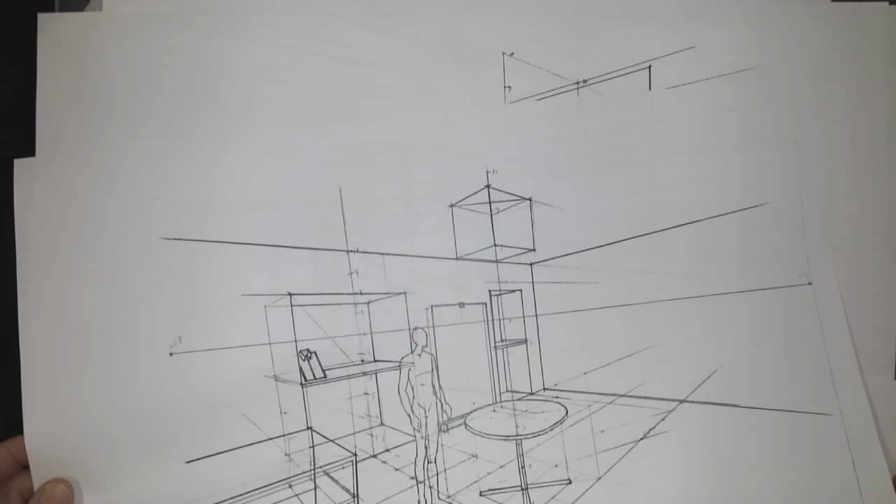So we're at the point now where we're detailing our retail space. This is just a section of it. Since it's going to be quite a large store, we're only just looking into one small corner of it. You're going to choose which one you're going to use, either this diagram or this diagram. And whichever one you choose, you're going to have to deal with some empty space.

What I did was bring my chair over, the one that was missing from this view with the table in it, and put in a couple of built-in displays. And I kept essentially everything over here. I kept the banner in the right place, but you can change this about. It doesn't have to be exactly like that.

And then I put some mannequins in this built-in rather than putting merchandise, and I put merchandise in here. So whichever one works best for you, that's the one you're going to start with, but plan on adding some more so that you can have a balanced space and not empty spaces.

Even for my figure, I needed to find someone, and it fit pretty well with the figure that I had chosen already. There wasn't much to do to change him, but I needed the detail on the clothing, so do find references that are going to work for you. Also, I needed something for my light fixture. Everyone's got a light fixture, so you're going to need to find that.

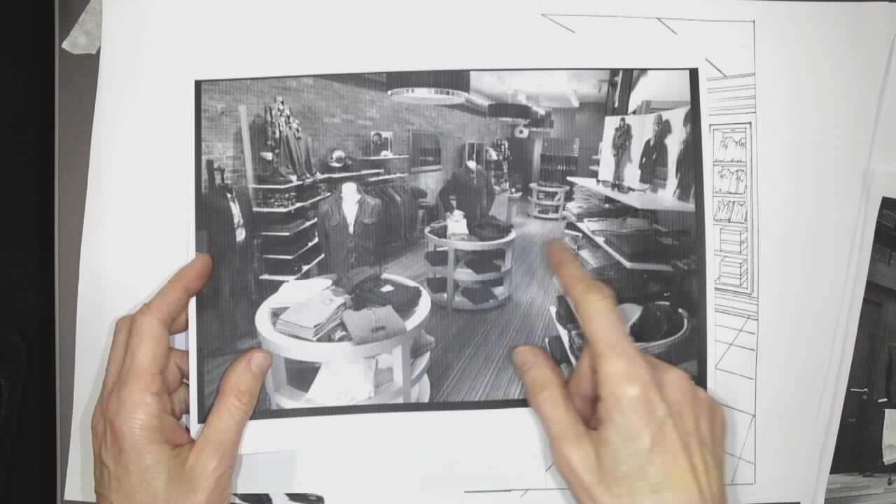And I also needed them for my displays, how to lay my merchandise out, how it would look, how to draw these collars, all of those things, and my mannequins, my half mannequins, how to draw them. So rely on your references quite a lot.

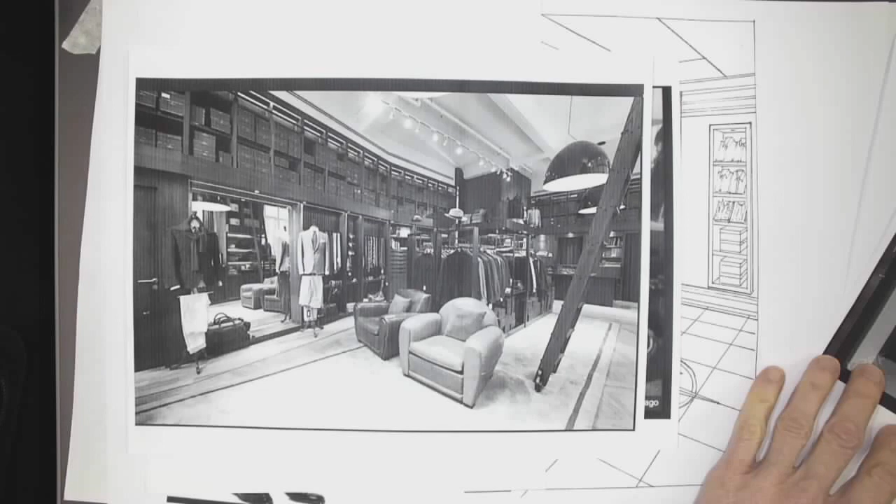Also, it never occurred to me, but some of these shelves can be filled with boxes for shoes, so that was another way to fill up some of this space. If you don't, it's going to call attention to it. And that's not really where we want to be looking. We want to be looking at the whole space and how the whole thing is organized. Do rely on your references quite a lot.

So I love this all wood because the concept for mine, it's very important to have a concept for the atmosphere you're trying to create. I wanted it to be almost like a tailor's. I called it Ezekiel, an old-fashioned traditional name, a biblical name, so I wanted that sort of atmosphere.

And if it's all wood and leather, it will have that sort of appeal and look quite upscale, but modern as well. The suits are tight-legged and so on, so the merchandise will stand out from that austereness of the traditional square. Everything is really quite square. And I put the compass with my logo because it too is a traditional visual icon. And I have it as an inset in the tiles of my floor.

You try to plan your balance as best you can. Anything that's a circle is going to call a lot of attention. So you really have to repeat it so that it's not the only circle. So when I put this here, all my attention went right there and nowhere else. So I had to balance it out with other ellipses and circles in other places to get the space to balance. So count on doing that.

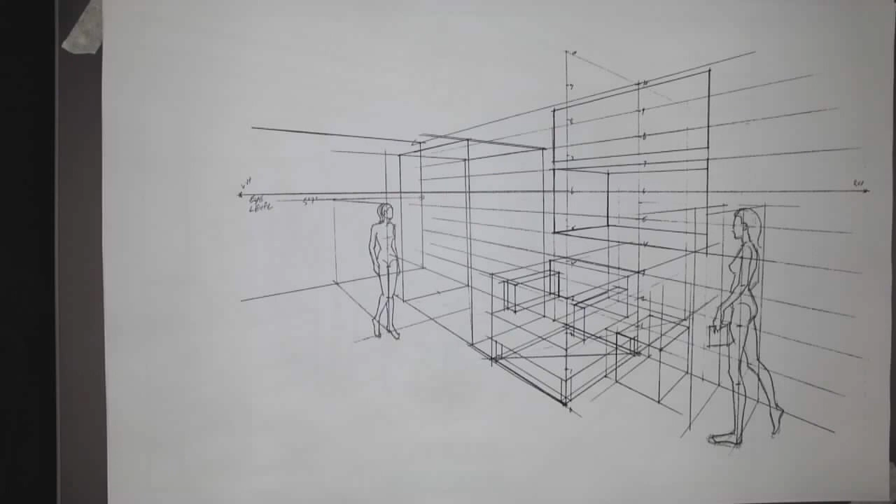Now if you're working with this drawing, what that means for you is that you're going to need to find it, first of all. And how you do that is to use your vanishing point. Now we found that this was the center. If you'll remember, we made an X here and found that this was the center of our display over here. I'm using my vanishing point.

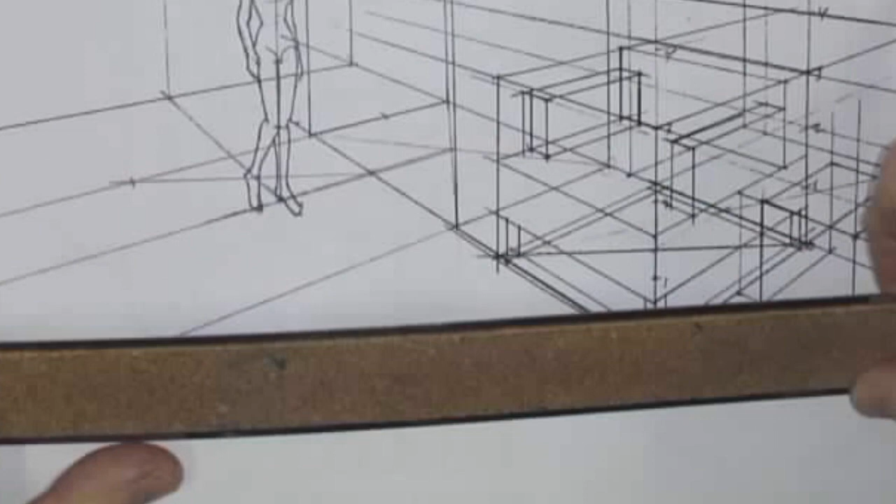Now, this was 3 feet on our floor plan. Remember, it was 3 feet. This is the center. So remember using that diagram. If I extend these lines, and I use this diagram, I go from this far corner at the back and through the center of this. That will give me the next 3 feet. And I have to go not just 3 more feet. Okay, there's 3 feet.

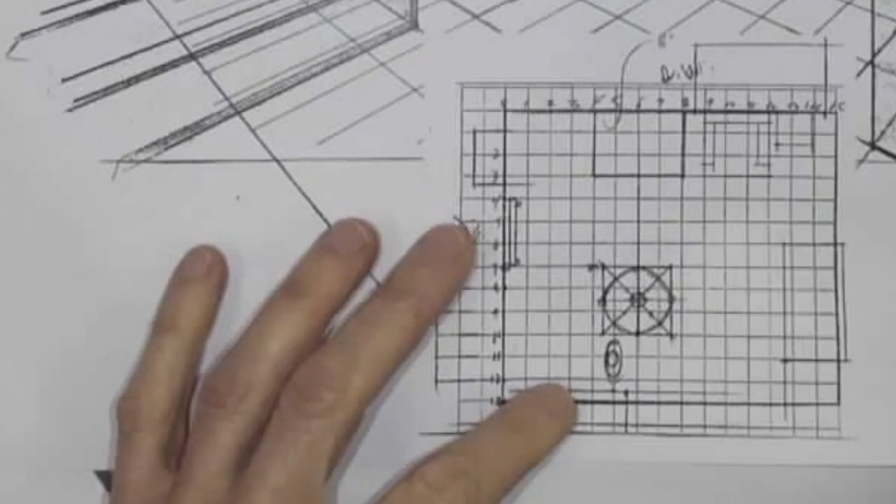And this is why I wanted you to bring all of these back so you can refer to them. So if you look here, the center of the table is where the light is hanging. So we need 3 more feet. 1, 2, 3. We've got that. And then we need 2.5 more. So I may as well go another 3.

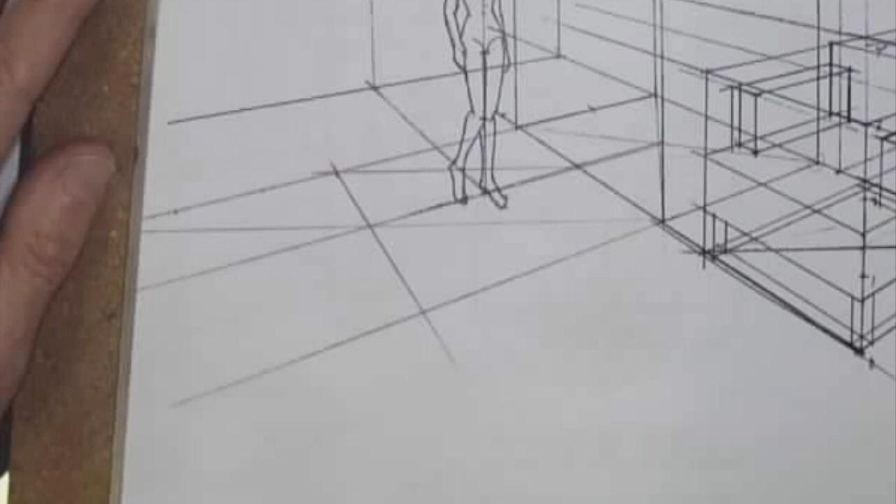So I've gone another 3. And I'll just divide that into 3. And I'll get 2.5. So 2.5 is right here. So my light in this drawing is going to be that far away. Which will give us some good side lighting. So remember too, it's in the middle of the table.

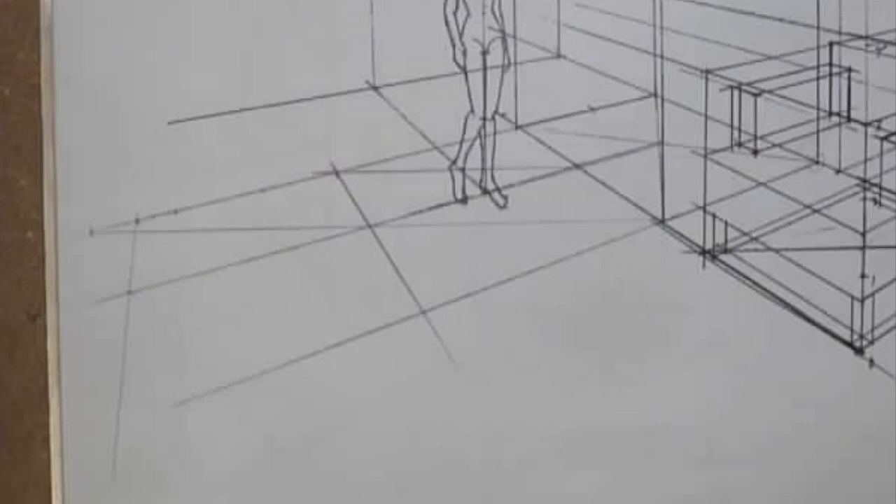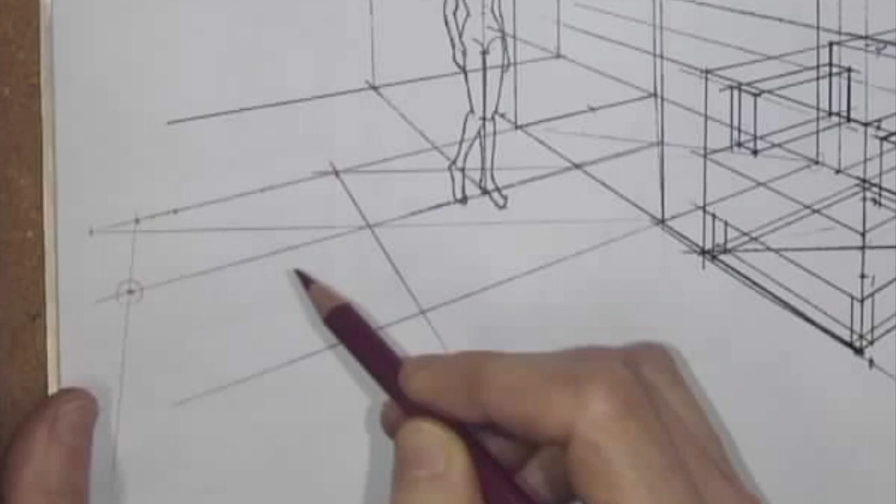So again, we've got 1, 2, 3 feet. And then 1, 2.5 to the center of the table. So 3 feet, 2.5 to the center of the table. So that's the center of the table. And you have to take that now back to the wall. I'd take it to this wall because this is too distorted over there.

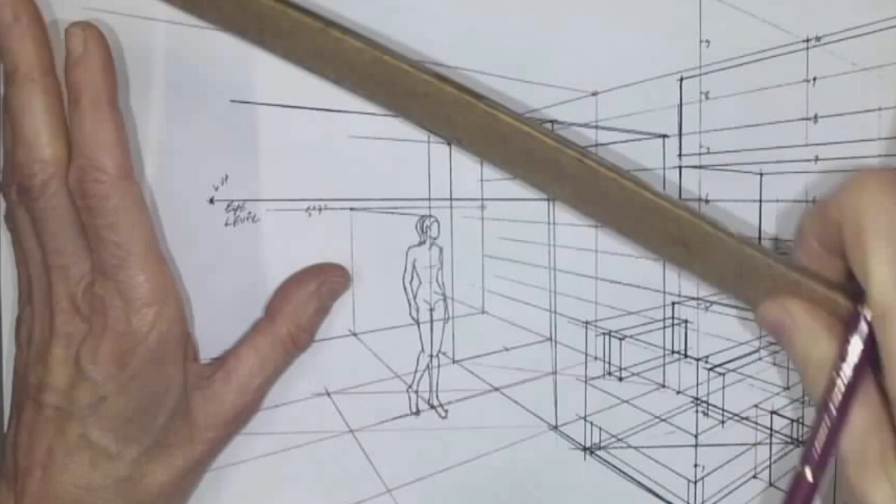So we're going to go all the way up to this wall, go up the wall, and go across. And bring this center of the table straight up. And that's going to give you the light source for your room.

So anyone that used this drawing, you need to locate the center of the table by going 5.5 feet this way. Go take it back to the wall, go up the wall, bring it across, and join where the light is hitting the floor above the table to the ceiling. And that'll give you where your light is. And you can use this now to map out your shadows. On the chair, the shadow would be going this direction. On this little table, be going this direction.

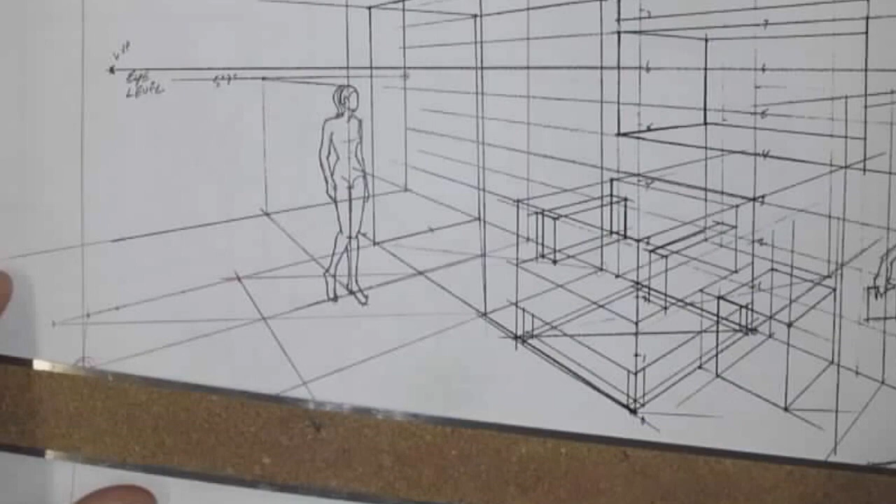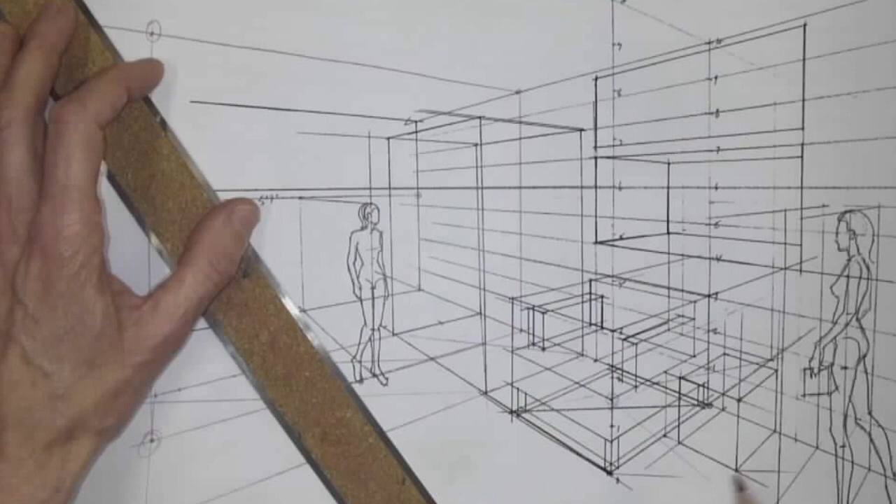Now everybody should be really familiar now with how to do your shadows if you did some of the exercises from the last week. I take the dot on the ceiling and go through all of these heights now, all the top planes. And that will give me how long the shadows are. Now, if I don't like how long they are, because they're getting quite long over here, I can make them a little shorter. I don't have to go with this, but this is what the shadow would look like.

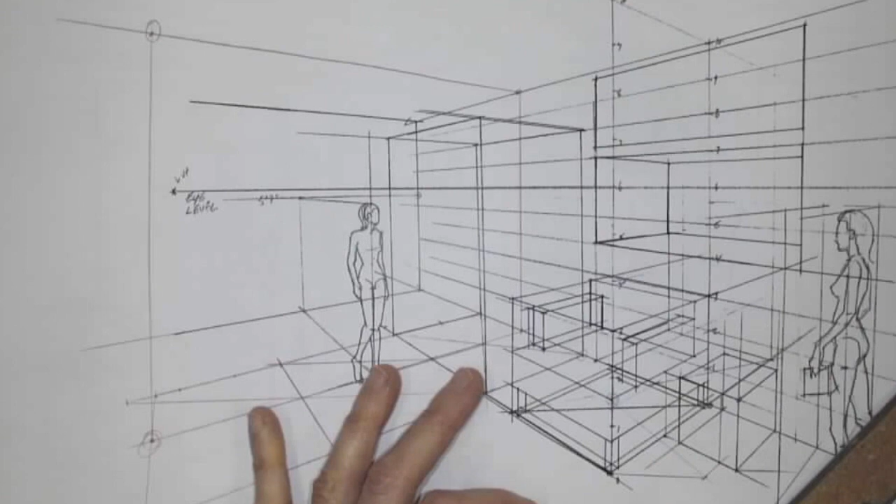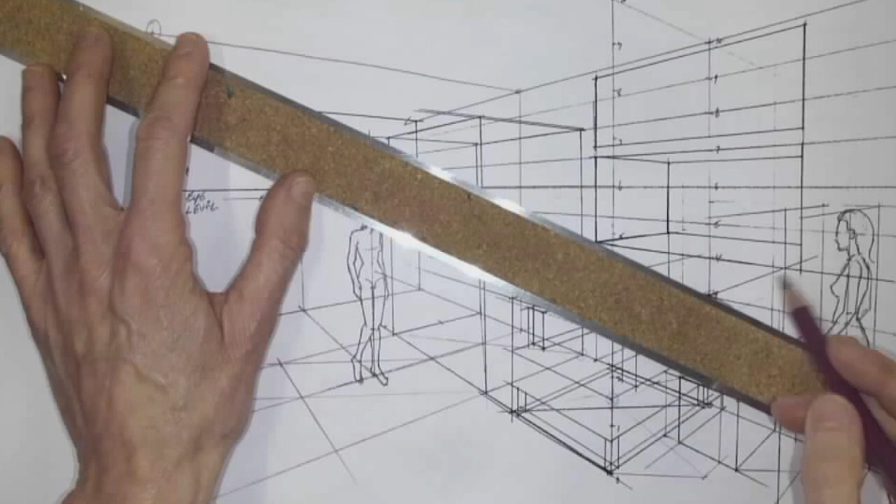And then it would go back this way. And then it would go up the box. And go across. So you just follow it. And it would probably stop there. Now, the top of the back of the chair against the wall will have a shadow. And you use the top dot to give you that angle. And you can probably bring it over. You don't have to bring it over very far, just maybe what looks reasonable.

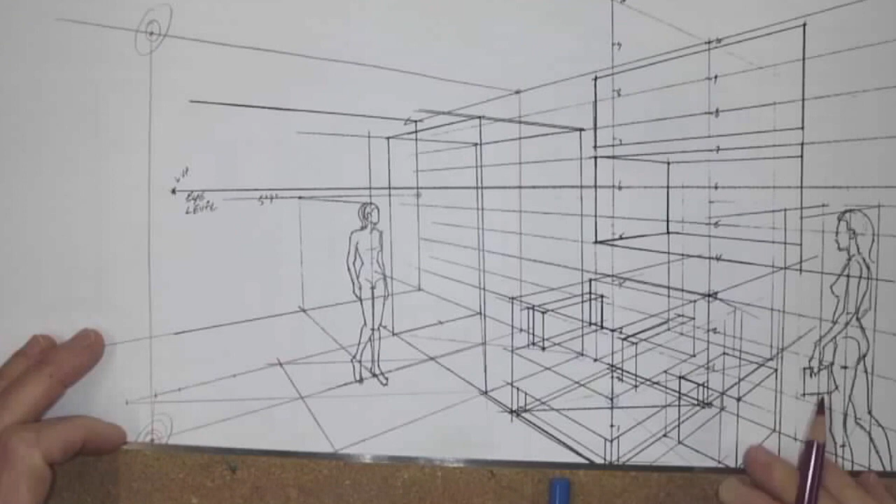Now, there are legs on the chair, so you would go to the farthest. Just remember, you use the bottom one to find the shape of the shadow on the floor, and the top one to find the length of the shadow, essentially. So, now I have to draw a line here. This is the shadow for that line on the chair. This is the shadow for the hidden line on the chair, of the leg of the chair. And this line is the shadow for that.

So where this leg met this gave me this line. So this is now the shadow for my chair. And this leg would have a shadow too. So that would be there. Now when you have a shadow attached like this, that side is all in shadow. So this whole side of the chair is going to be in shadow. And this is part of the shadow too. And this side of the arm is in shadow.

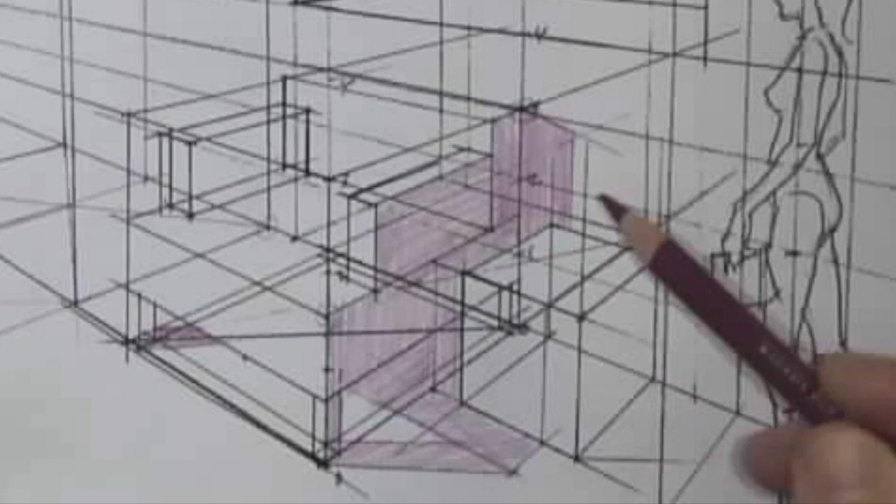And this is shadow. And the shadows help to hold the whole drawing together. And this is shadow too. But I don't think I would put it this far over, but you could put it. It might make it look dramatic though. As long as you don't put it in too heavy, that should be okay. And this side is in shadow. But you see, it starts to pull the whole drawing together.

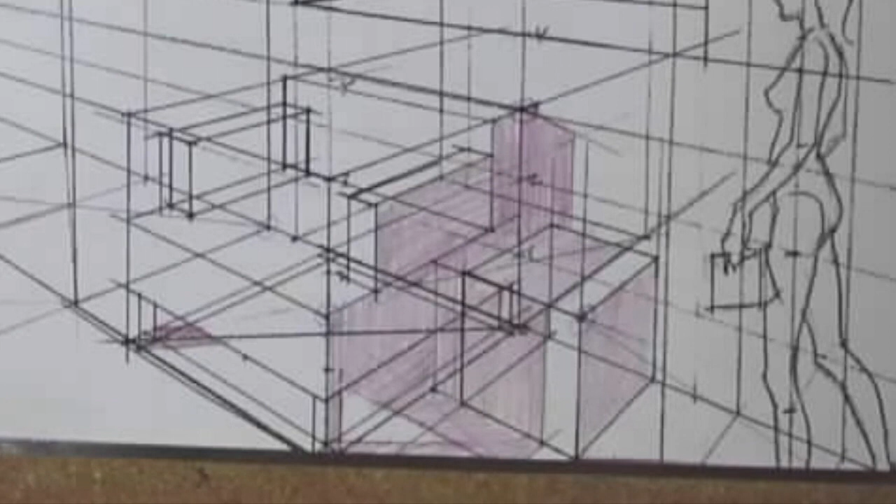And to get the length of that shadow, you go from the top corner, just like we did here, top corner, see where it touches this line, as this is the shadow for that. So these are long shadows, I think because the light is so far away. But it's dramatic. Where they cross, then you know to go the other way. So I'm looking for the shadow for that line. So I use this vanishing point. And when it hits the wall, you go straight up.

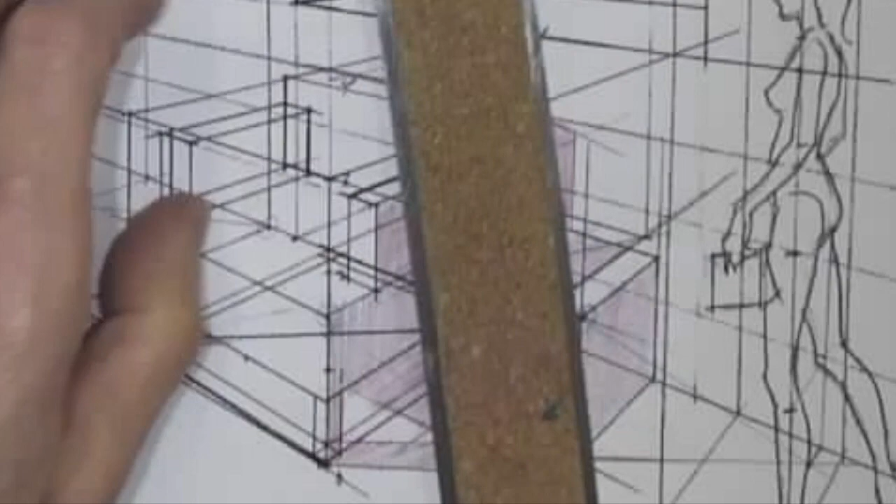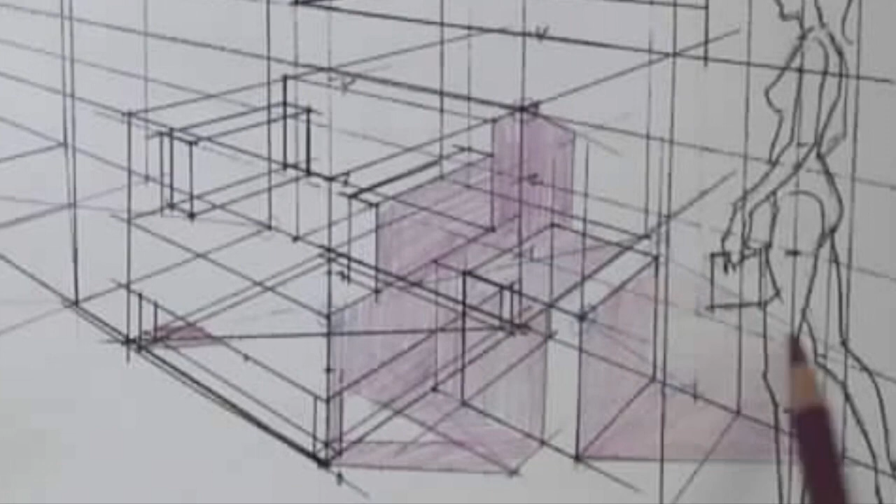And this again is the top, so I'm using the top dot to do that. So that would be how that whole little section would play out. So you just need the top dot for these. This is a built-in, so that would be shadow all in here. Now you're going to have lights above too, so you might have a penumbra here.

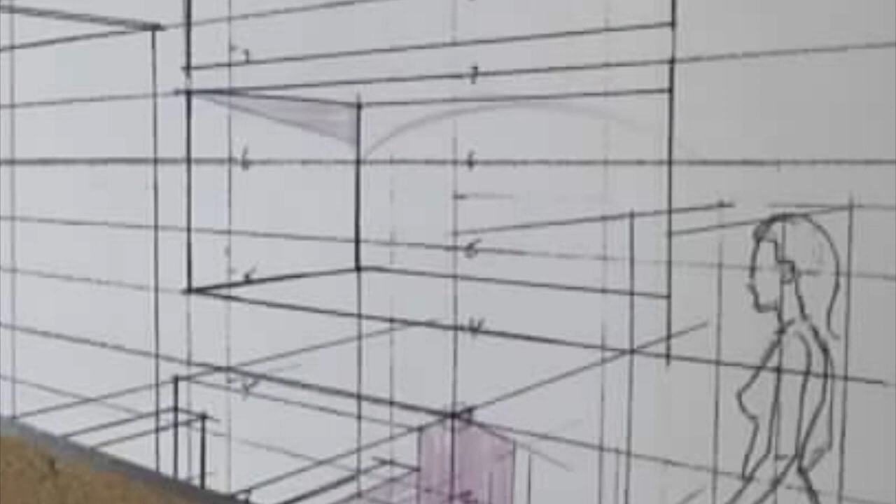If this is, now you've got to remember this goes like this, so the center of that is not where you think it might be, but there would be a little bit of a penumbra in here. Even the square lights in our room cause this to look curved, so that would be round. This arm, it would have shadow too, so you'd have to go up here a little bit. Just go up on this a little bit so you're about the same height, and that would be in shadow too.

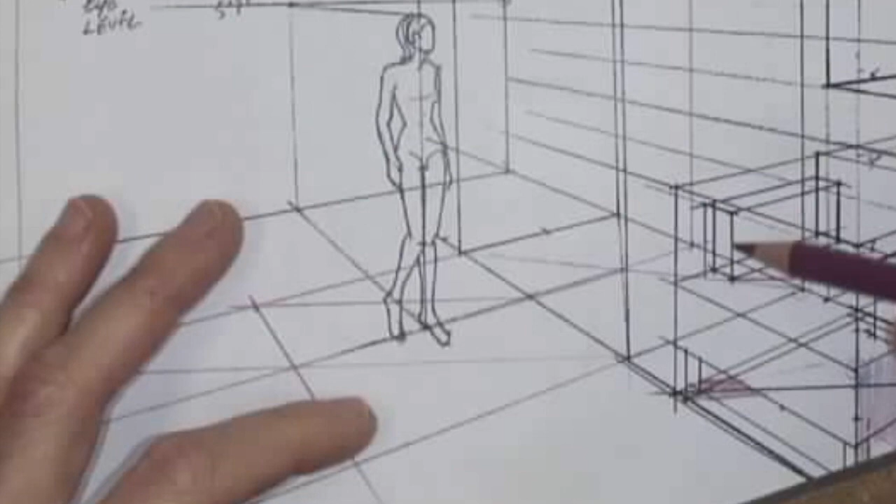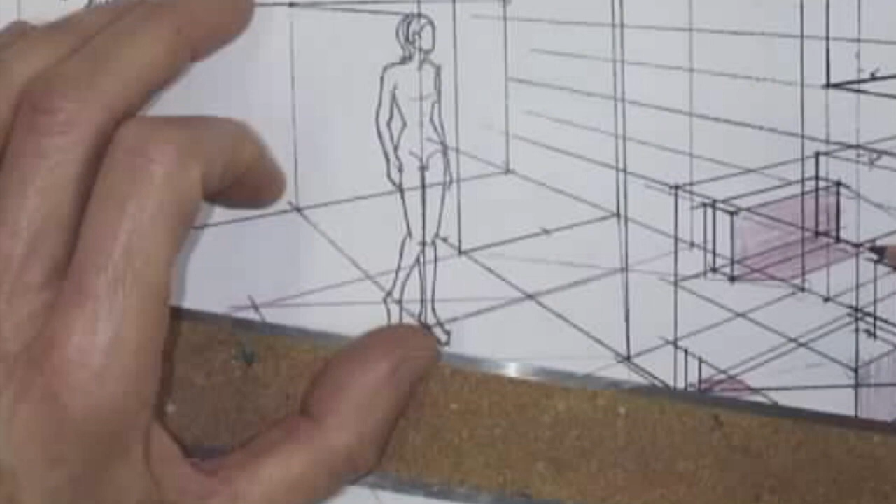And this would give you the shadow over here on the back. And this goes over to the back. So it's just the same as what we did in the little boxes that you did for homework. This now, if there's a light here, even if there is a light here, this is going to be in shadow. It washes the wall down below with light, but this would be in shadow.

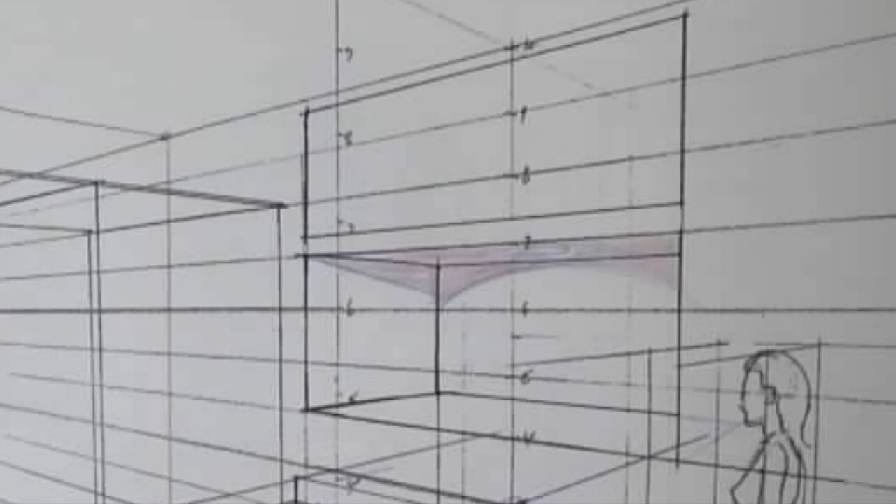Okay, and the banner, probably it will just have a little bit. If it has some thickness, we could put a little bit of shadow underneath it to help pop it out a bit. You'd use your ruler, of course. Now for her, you do the same thing. Use that dot on the floor. And we wouldn't want to put too much shadow for her, and we don't want to make it too... you just kind of start a little bit of a shadow for her and let it taper off. It would actually go up the wall, but I don't think we're going to see all the way out there.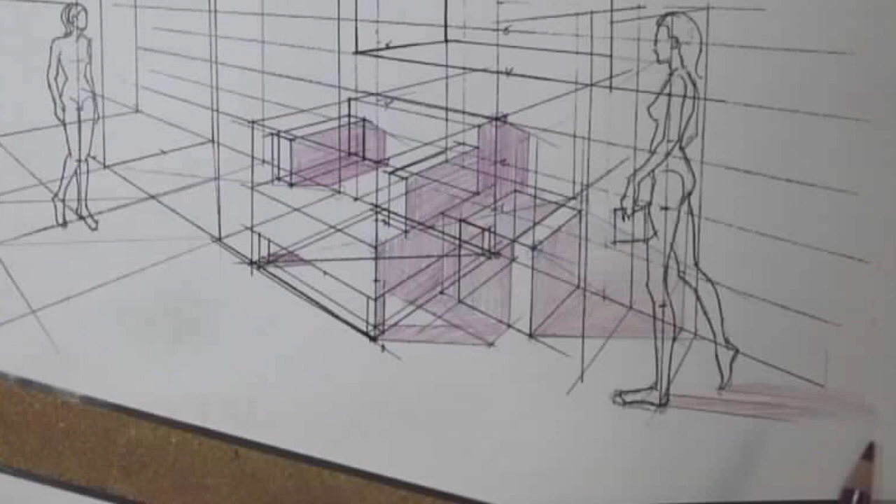That would be enough. And this one, she's behind the light, so that would be shadow out this way. And again, you wouldn't put too much. It would be her silhouette, her sideways silhouette. Depending on what's going on in here, you may not see it at all. And then, of course, walls, they all have the bit of the penumbra, because you can see on ceilings that they taper off into a little bit of shadow up here. But the way we're going to fill our shadows in, I'll show you. We're going to do some hatching.

So, now this too is blocked, so this would be all lit up. There isn't actually shadow there. This now would have shadow too. Because remember, we built it out from the wall, so that's going to have shadow too, which will help set up the chair. Now, we wouldn't have known that, and that may not have been possible, depending on where

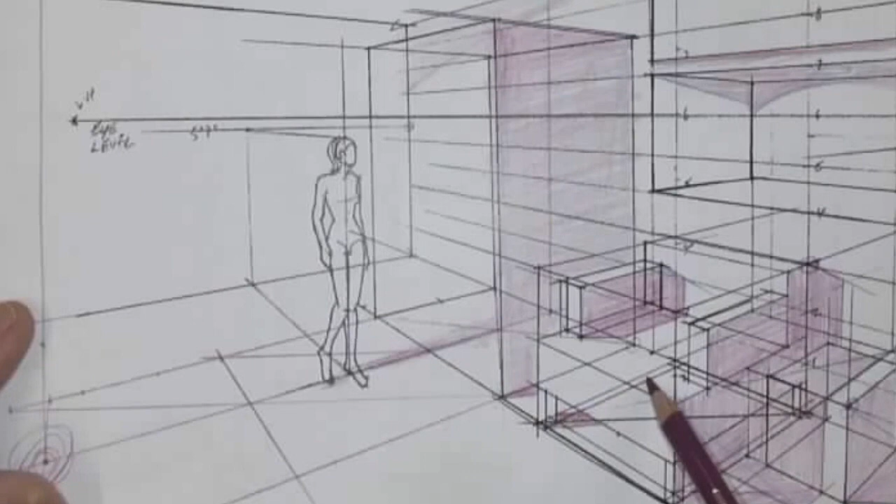this was in relation to it, but it's over to the side a little bit, so we will have shadow there. The shadow would probably go up the side of the chair and cover a little bit, but I wouldn't bother with that because we want the chair to stand out. And then this wall, it too would have a penumbra. The back of her, you see, would be in shadow, so it would just be the back part of her.

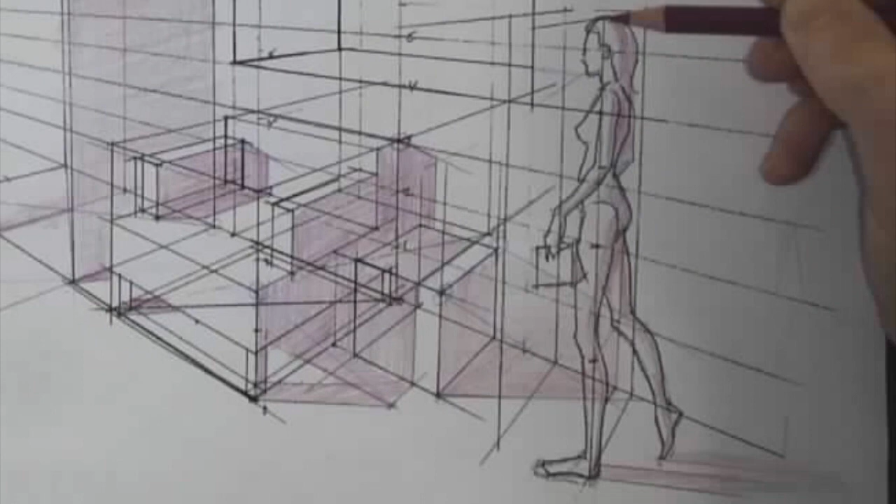And that leg would cast a shadow. And then the back, that would be in shadow, and the back of the hair. And then undersides are shadow too. We don't have too many of those. Okay, so that'll make a nice strong piece.

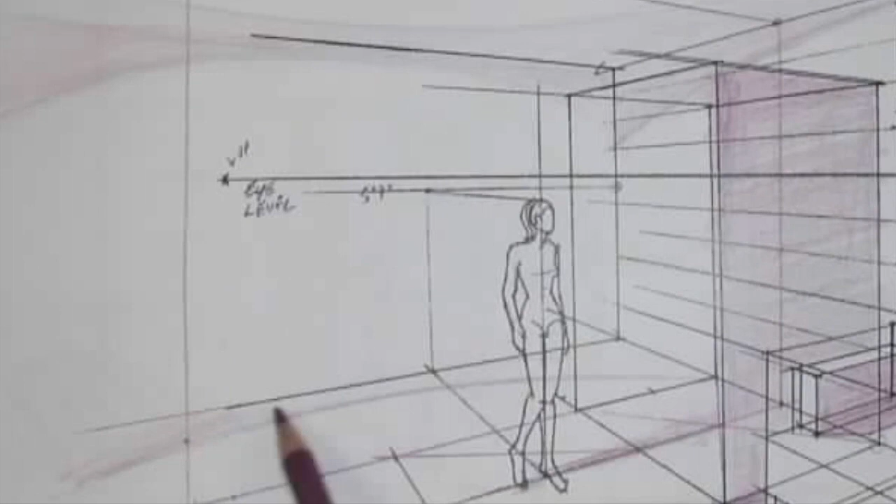And then on the floor too, but you're going to need to put something over there if you're using this side. And then this would be a little bit in shadow too. But just ignore that part, because I just wanted to show the whole wall would get a penumbra.

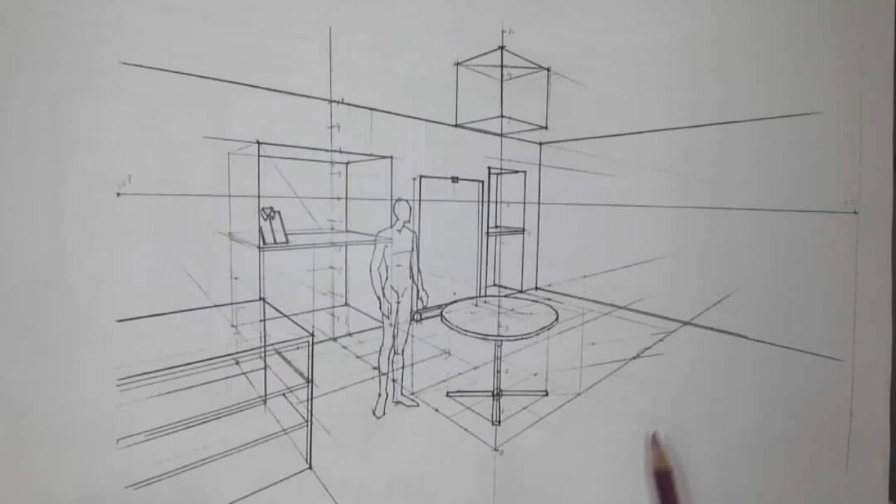So that's this side. Now the other side, you're going to use the dot that's right under the table, directly under the table. A circle, it's just going to give you a bigger circle if the light is right over top of it. So you just extend the X and choose a dot. Use your vanishing points.

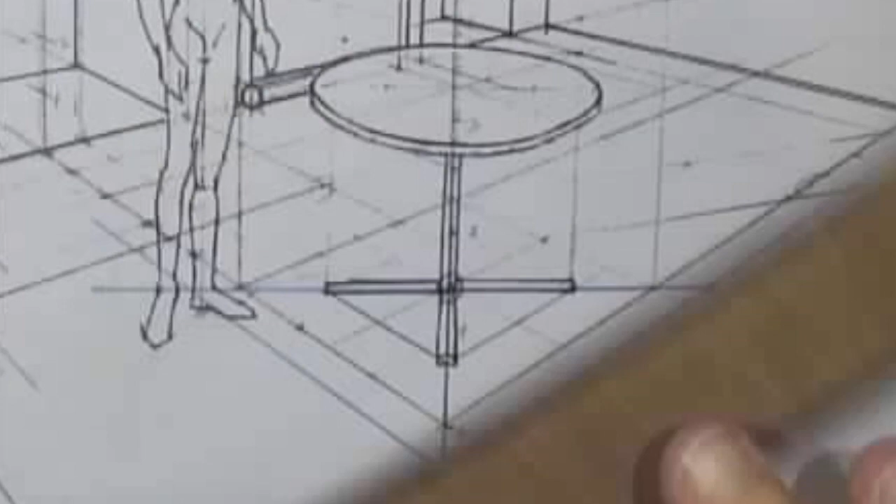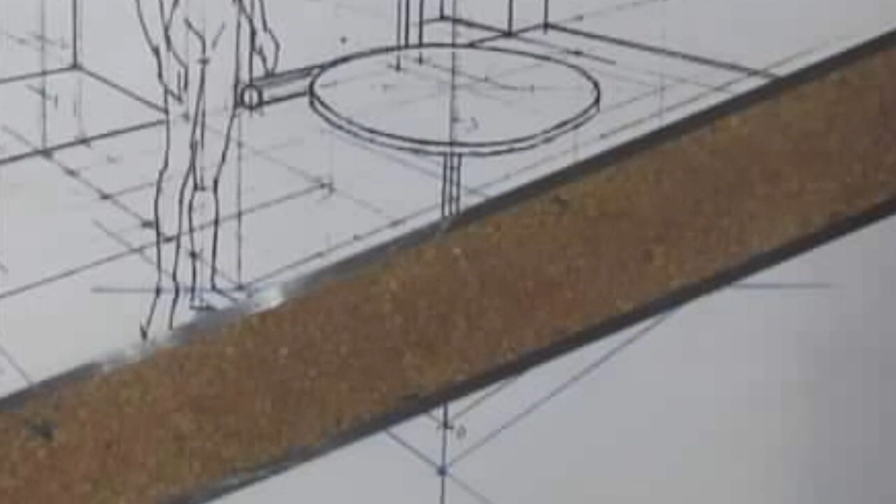And where it crosses your X, you go the other way. So you'll be able to find the bigger circle. Okay, and then you make your diagram, same old diagram, and that'll give you a bigger circle over top of your table, or underneath your table. So it's a little tricky because we've got all of this stuff going on, but

mine is solid, but I would use this same shadow. It's just a little larger. This comes from observation, so to give your drawing some real depth, the perspective does work, but you also need to light it. And if you do some sketches of things around you, you'll observe these things, and that'll help a lot to make things more convincing.

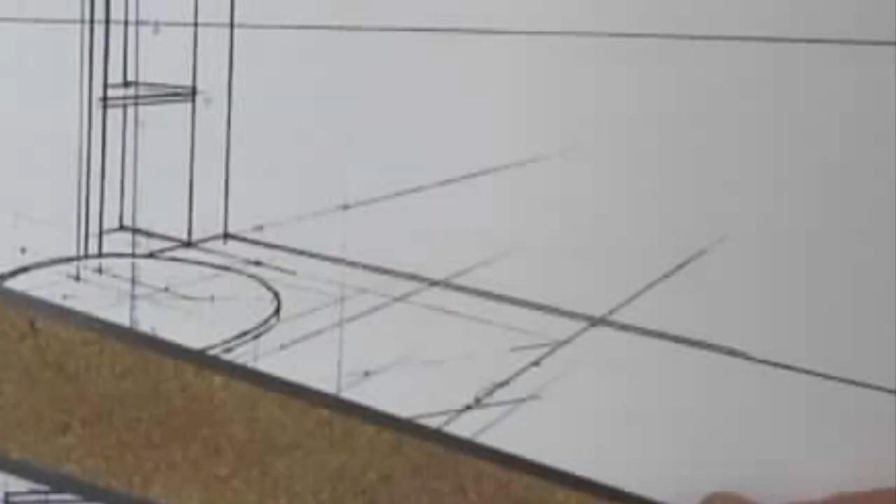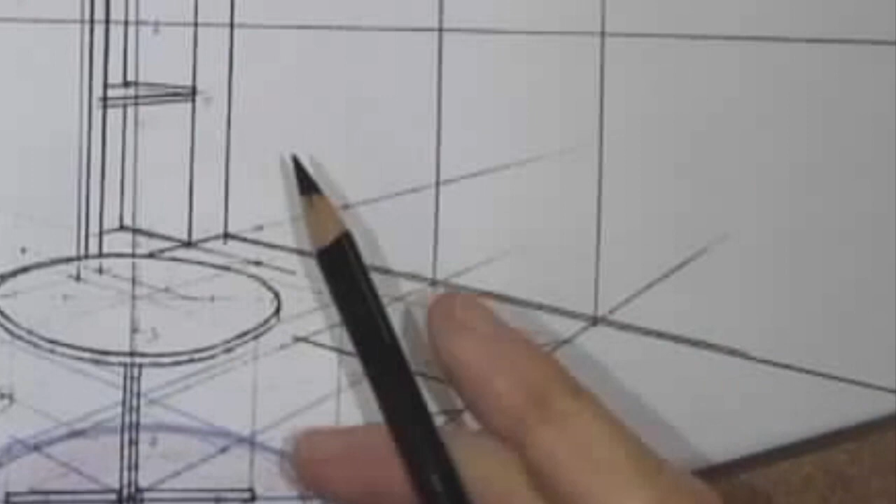So now there's not a lot in this drawing, but I put a chair over here. I'd have to put a box over here that's going to go with my chair. And it's 3 feet wide that I'm using. It's a big club chair, so it's 3 feet wide, and it's going to be 3 feet tall, so this is only 2.5 feet.

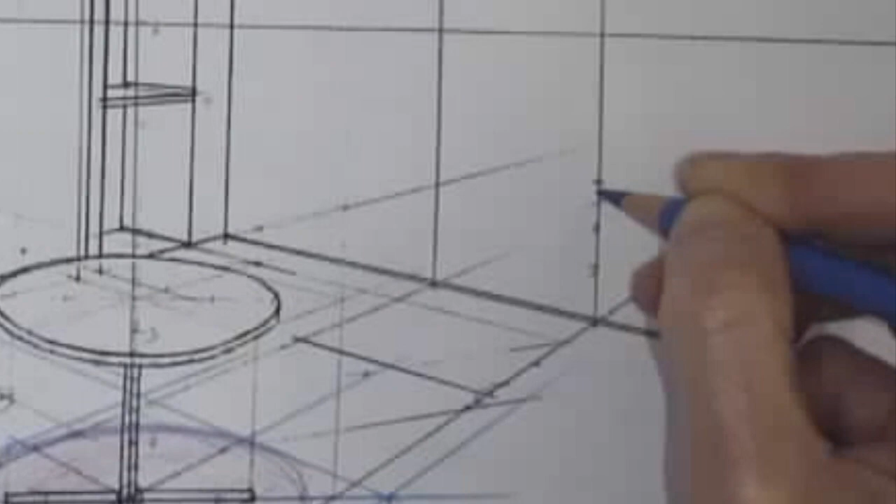So if that's 2.5, so 1, 2.5, and 3 would be about there. Maybe a little taller. I think I made it a little taller because it had that big back. Then I need to make a shadow for this box and see what that would look like. It's going to be a lot like the shadow I made for this one. I'm assuming it'll be a lot like this one, and pretty much like the other chair's shadow.

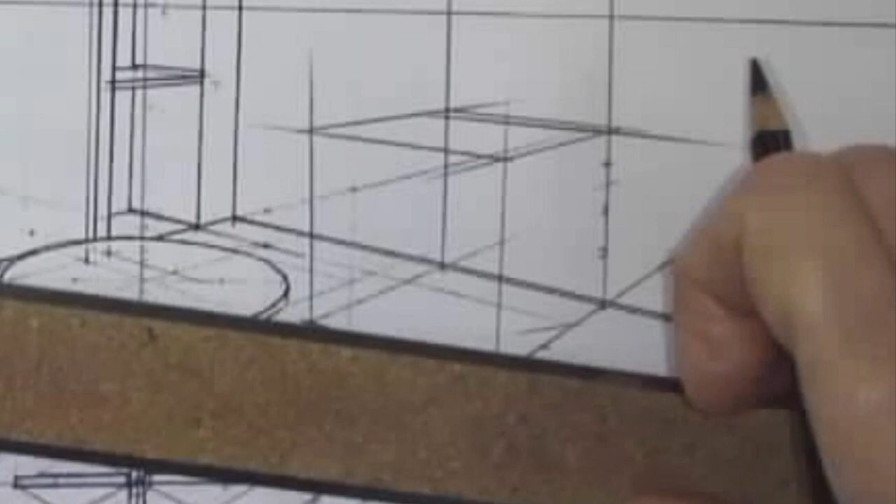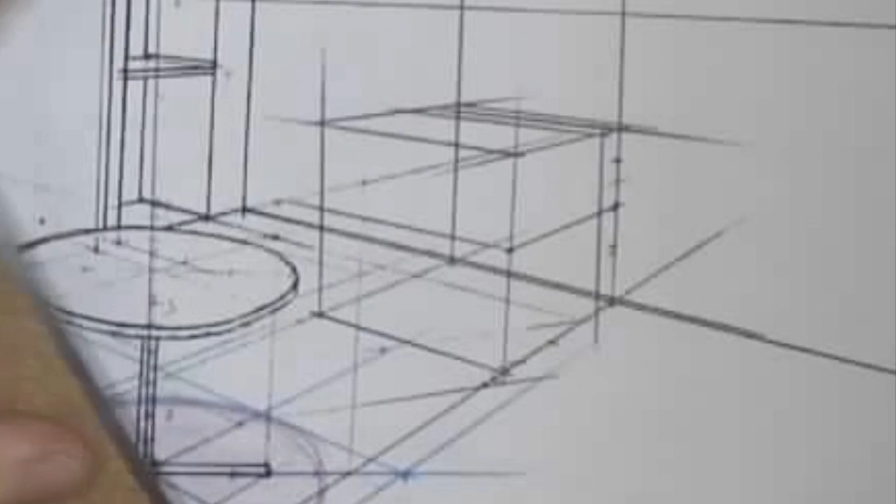Okay, so I'll just leave it at that for now, just to see where the direction of the shadow is. That's the most important information, what the direction of it will be. And this is out on a clear space too, where I'll be able to see the difference between the shadow for the arm and the back. So I'll just put up an arm quickly here. I'll just put one on this side. That's all I really need to get the shadow going.

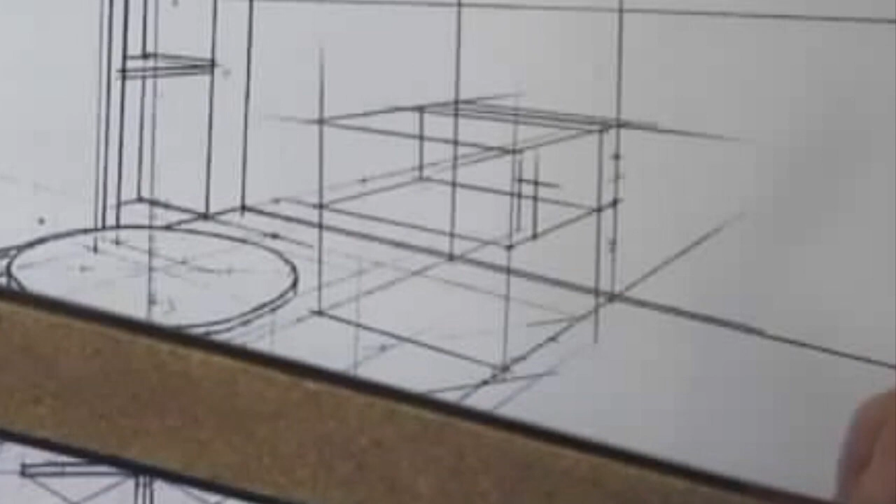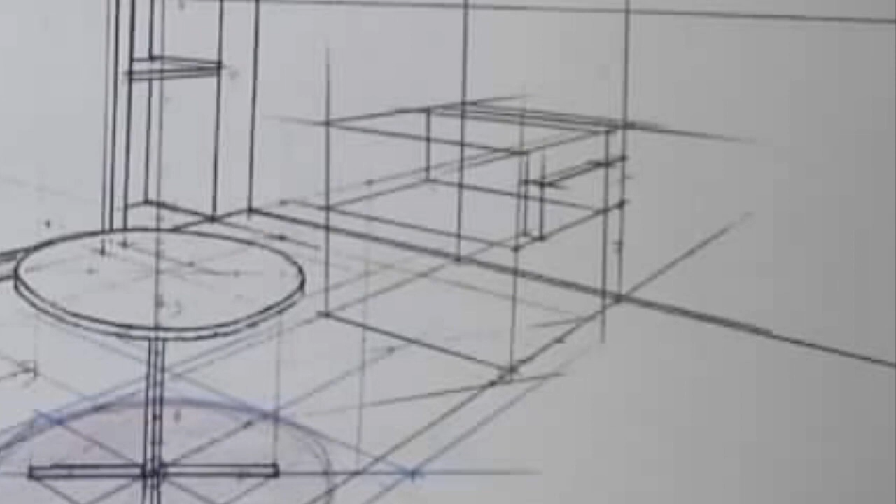Okay, so that'll do for now, and I'll use my point here where the light is. So I've got my two dots. I've got the one at the top and the one at the bottom very easily in this drawing. Now I'll just bring that over, and I can use the dot at the top, or I could use this dot at the bottom, the middle of the bottom. Whichever will give me a shorter shadow is what I'm interested in. I don't want it too long.

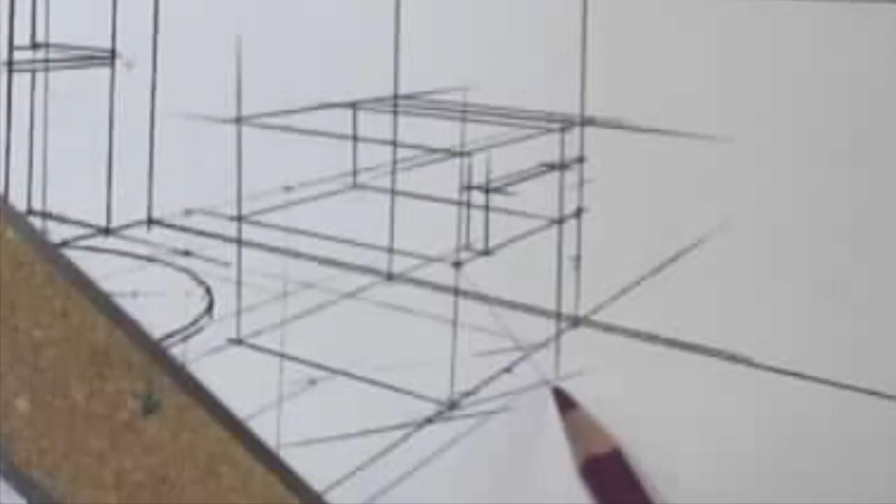So they cross there. So that's a little nicer looking than the big shadow that we had before, although I like the drama of that one. It was kind of nice. So there's that. Now, to find the shadow for the arm, you have to bring it down to the floor and see where it would be on the floor, and then bring it along with your dot on the floor over like that. And it goes higher than the seat.

So I just use my dot at the top to take the top of the arm to the floor, and it actually will be right where the wall hits. So the shape of that shadow will be, this is for the seat of the chair, and this leap up will be for the arm of the chair. It's kind of an interesting shape, bop, bop, bop. And then you go up to go this way, and then you just need the top dot to do the top of it. And that'll be the shadow for that chair.

Now you have to modify it a little bit for your own design. It may not be exactly like this, but it'll be similar. And then we'll just do this. So that's where the shadow would be on this chair.

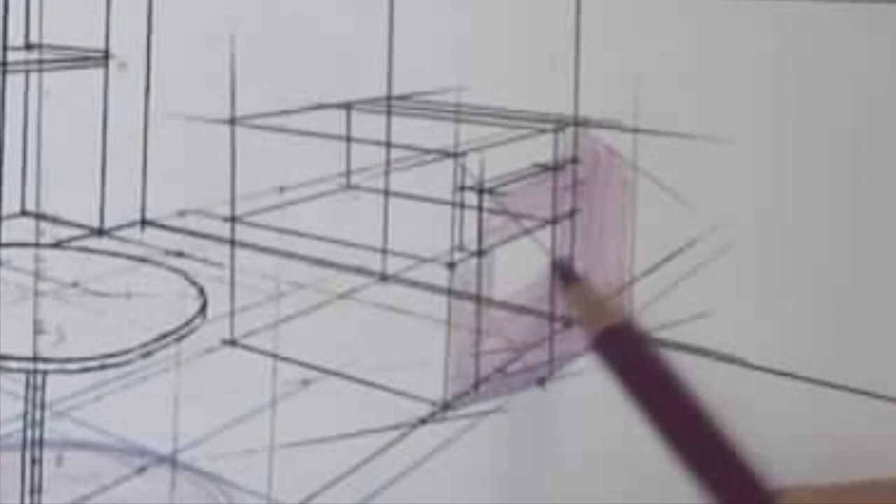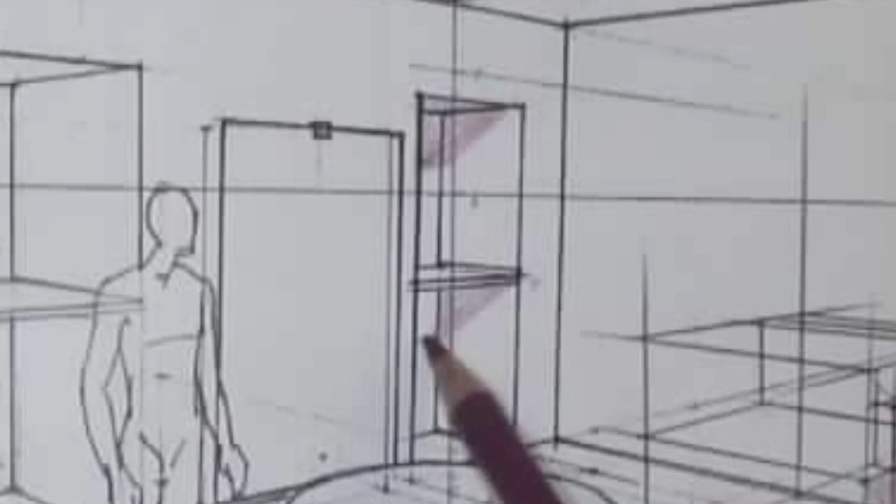And shelves generally, even if you don't see it, if the top dot isn't giving it to you, put a little angle like this, because there's always light above, and your shelves are always going to have some shadow in them like that. The banner, this is going this way, so it's going to have a little shadow behind it.

That's all. And if he's all lit up in the front, then it's his side planes that are going to, the top planes are all lit, but this side of him is in shadow. And probably below the knee, and then the top of his foot will be in the light, but the side will be in shadow. And then this whole part of him is lit up, so maybe his arm might be in a little bit of shadow. And maybe below his leg a little bit.

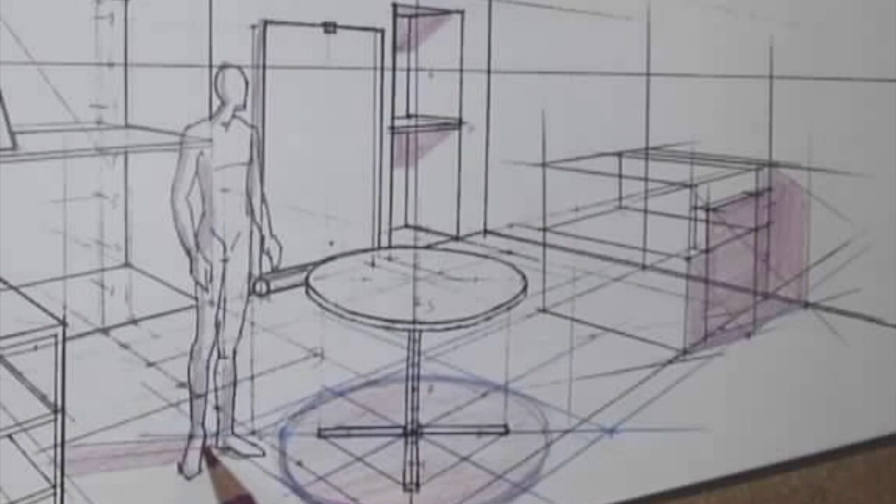And then underneath him, the shadow's going to go. I usually just put a dot in the center and bring it over and bring the width of his legs over, and his shadow will be going like in this direction. And this one, again, you can use this one now and put a shadow there. Remember, if you have a light in there, it's going to make a penumbra, but this part will be in shadow.

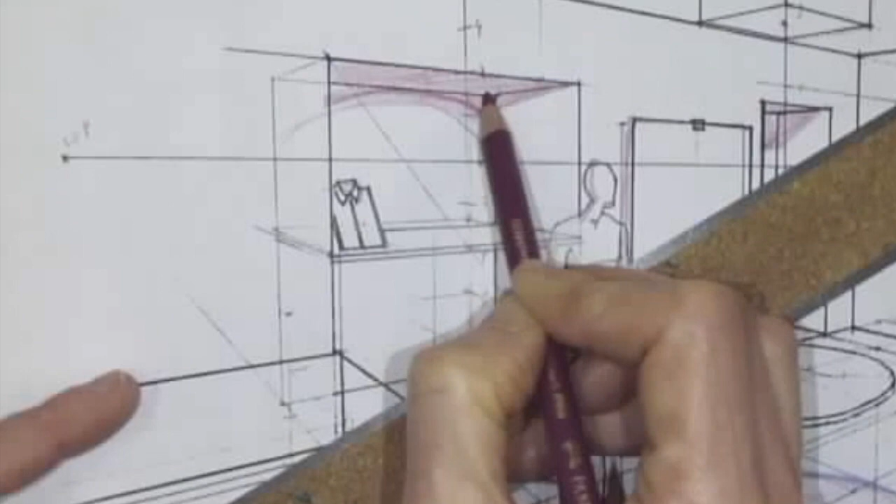These probably have a relationship to each other, so this penumbra probably starts like that, rather than going as far as I went initially. And this will be in shadow, so you use your dot again. This has a lot of shadow, if you even have a shelf here. I don't know if everybody will have. I think these things you can adjust quite a lot.

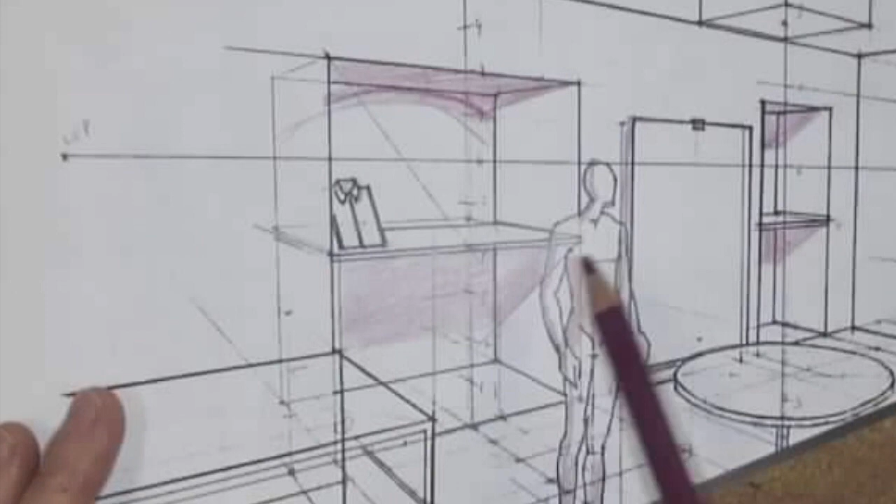And the part that you don't get from the dot, you use the vanishing point. So if this is the shadow for that, then you have to use the vanishing point that you used to draw it in the first place. So there's that shadow. Okay, and this will get lit up.

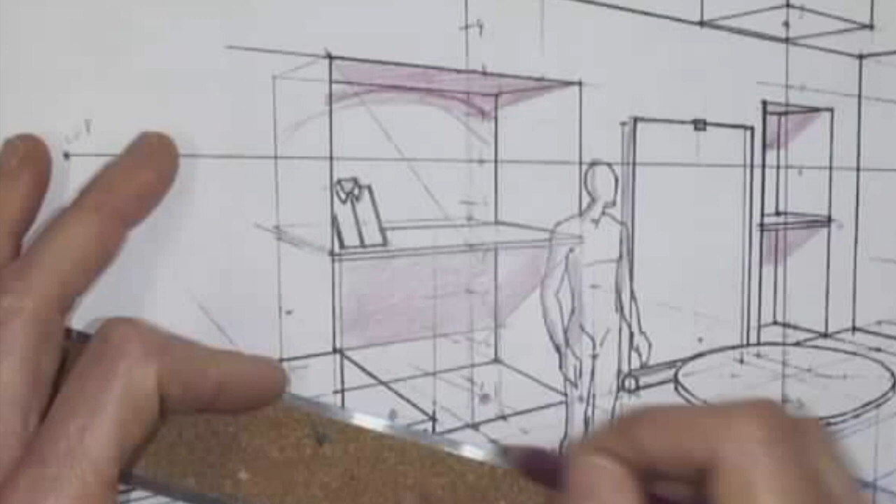But my mannequins, their shadow would go behind them. So I know I have one standing here and one standing here. So just to plan it out, I'll plan it out here. And they will go back like that and go up the wall. So they go up the wall quite a bit further back than the mannequins themselves.

And this one, it's in the light. So the light is just lining up with it, so it's not going to have shadow over here. But if I could see through it, it would have shadow behind it. But I can't see through it. But these shelves, they would have some. So I can use this dot to give me a little bit of shadow in here.

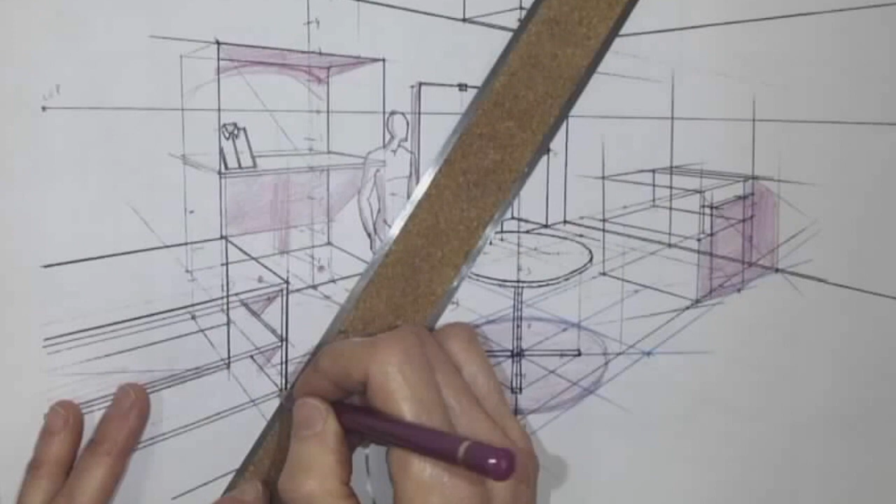And then whatever else you plan to put in, you'll have to figure out what needs shadow. And then we'll just... And where it touches your shelf, you bring it across, and that'll give you more shadow in here. So part of this merchandise will be in shadow, part of it will be in the light.

Anything that's sitting on the table, it's going to cast a shadow on either side of it. So if it's right in the center, if it's round, it's going to have a shadow around it. If it's square, it'll have a little bit of a square on either side of it. So we'll have to look at that too.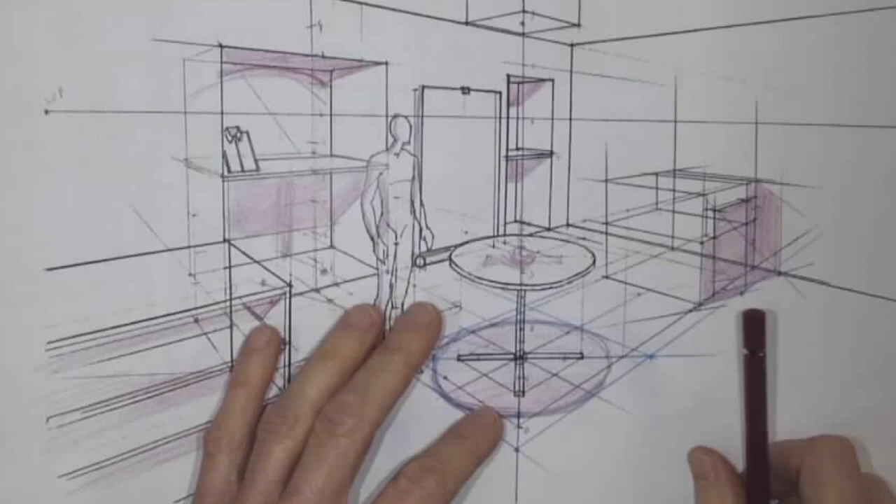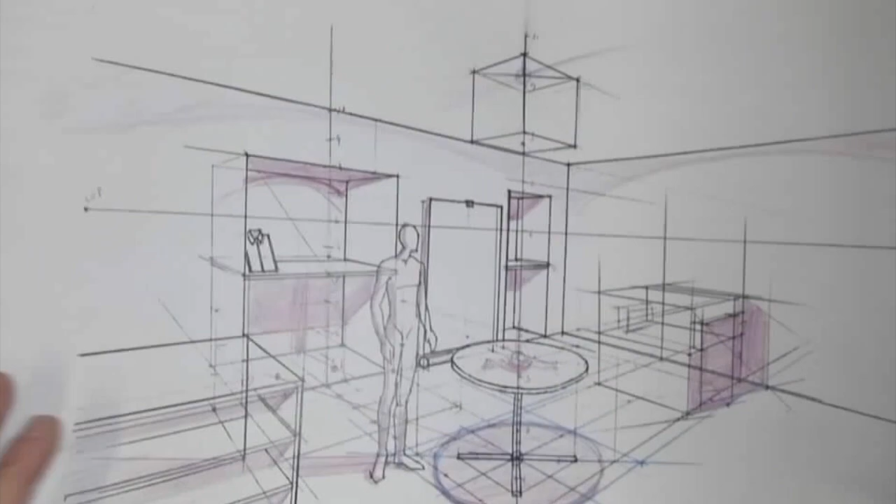So now, how do you put that on your drawing? So after you get everything inked in, say a single weight of marker, because you want to keep a light weight for all your inside lines and a heavier weight on your outside lines. So after you get that all in, then you go back and you start to put in heavier outside lines. And if you're working on marker paper, and you are, it's probably better to use your Pentel sign pen. It's a better choice for this.

And then you want to find a really skinny pen to do your hatching. We're going to do some hatching. So you saw how to do that, I think, in the last exercise.

So I'm going to use my map now. This is my map for this side of the room. So I'm going to use it, and I know where the center of the table is. It's right there. I would use this dot to bring over my legs and then this leg as well.

And then I'd use the top dot to the tip of the seat. So that's my top dot I'm going to use right there. That's right there. So now I know to go the other way. I don't have a vanishing point anymore, but I can tell from the tiles on my floor. Now if you put tiles or anything like that on your floor, you're going to need to use your vanishing points to map it out.

Now hatching, as you know, is just vertical strokes, so you're going to put vertical lines to fill in the shapes of your shadow once you have it. And it's better to do it with a ruler, but use the thinnest pen you have for it. We don't want these to be too heavy.

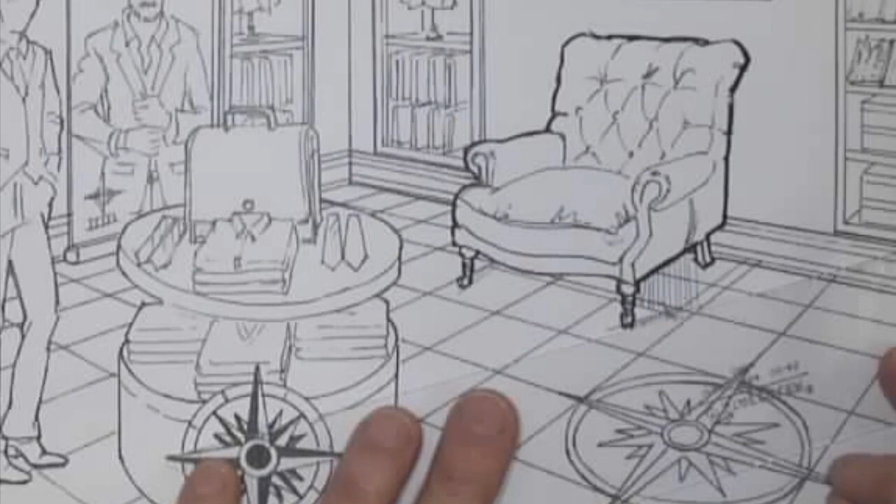Now, I've got the shadow for my arm to do too. So that's the seat. The seat is right there. I don't have a vanishing point, so I have to... So you see how important it is to really get these lines correct, so that when you have to estimate something on this drawing, you'll know how to do it, because you've got enough guidelines down.

Now, I have to bring the arm down. I'm just going to go up a little bit for the arm, maybe about there. And then go this way. And go up the wall. So you can keep them fairly simple, but, and this goes like this a little bit. You just change the shape of them to fit what you're doing.

Now this I should use my ruler for, but I don't want to take up all your time doing that. And I would just map in. Now remember, this is shadow 2, and this would be 2, so I have to find a nice shape that would describe my arm and describe the side of my chair. And you do them all at once.

The reason we use verticals is because that's the most predominant shape in the room. It will just blend in with all the other verticals, but it will lend this bit of contrast. And that's as far as we're going to take our drawing. We're just going to hatch in.

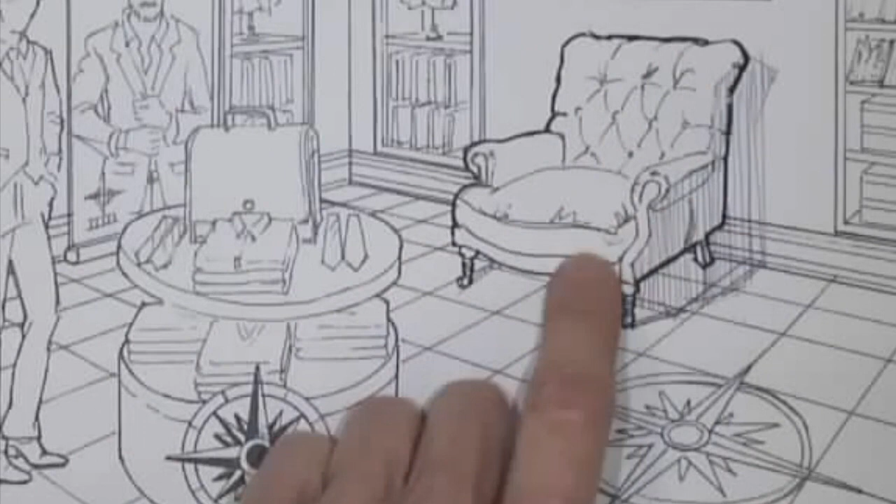And when you hand it in next week, you'll have it all inked in with thicker outside lines, thinner inside lines, and you'll have your hatching in and your shadows mapped. And that will be it. We'll be done. Now this, you see, it doesn't show an angle here for shadow, but I would put one in. We know there will be one in there, so you just go ahead. And this would be shadow, even though there'd be some shadow on the side here too.

A little bit. I put some beams on my ceiling. You can do some things with your ceiling as well. It makes it a little more interesting too. So this now, it would be in light over here because the light is in the center. But this part isn't getting light, so that would create a nice shadow shape as well. And it would cast a shadow along here. Would make a box. Okay.

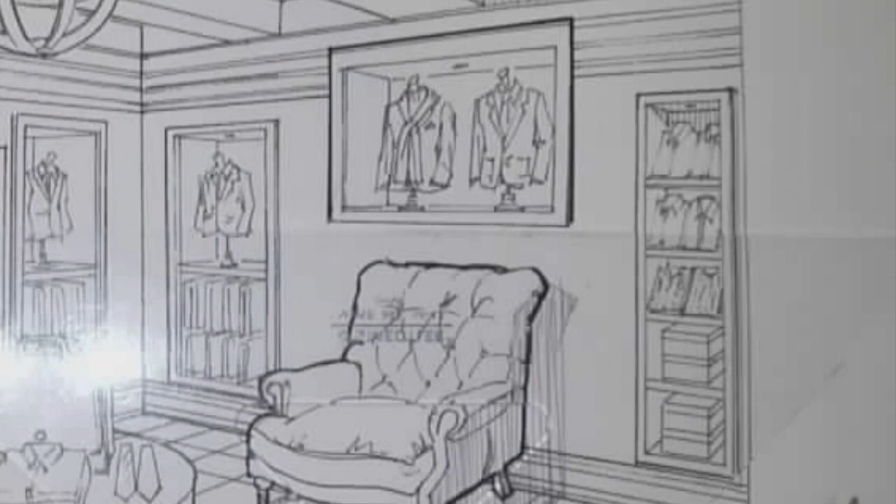Now when you go to heavy up your lines, after you get all your shadows mapped in, I wouldn't heavy up anything inside the display. I'm just heavying up the outside of the display. And I still think the Pentel sign pen is the better choice for doing that. It's not quite so thick as this one, but it's missing, so I'll do it with this one.

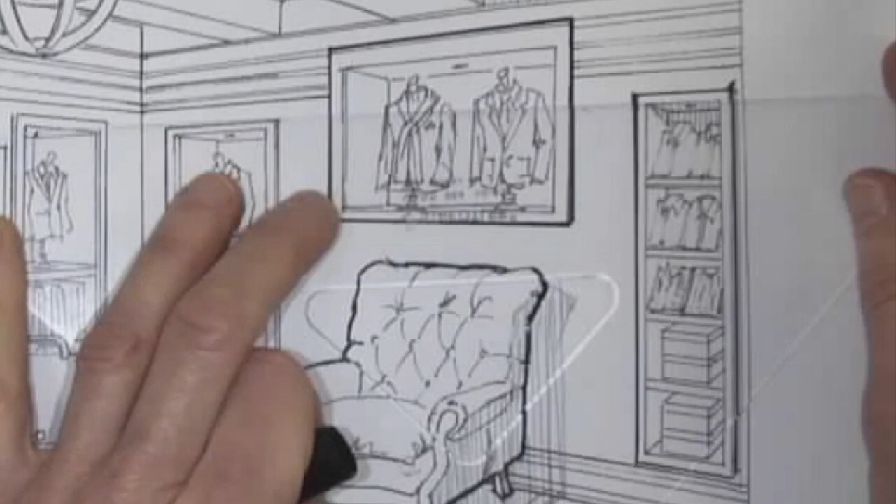And please be very careful when you're drawing your perspective that it stays correct while you're transferring it to the marker paper. And the reason that we're doing this is because we want to read it quickly. We don't want to have to try to distinguish one thing from another when we're viewing it as a client or anyone else. We want to understand it as quickly as possible. So in kind of silhouetting certain things, you're helping the viewer make sense of things.

Okay, that's a display built in the wall. That one is too, and so is this. And then there's a chair, big one, great big one, and it just makes it a more immediate piece of communication.

So I would just outline the lines of the floor and the displays. I wouldn't do the molding at the bottom here because I want lots of wood, so I want lots of little detail. The more detail you put in, the better, but then when you go to do this part, you leave a lot of the detail unemphasized. You just emphasize what says one big wall, and I don't have to say anything about the molding. It's there enough, just enough.

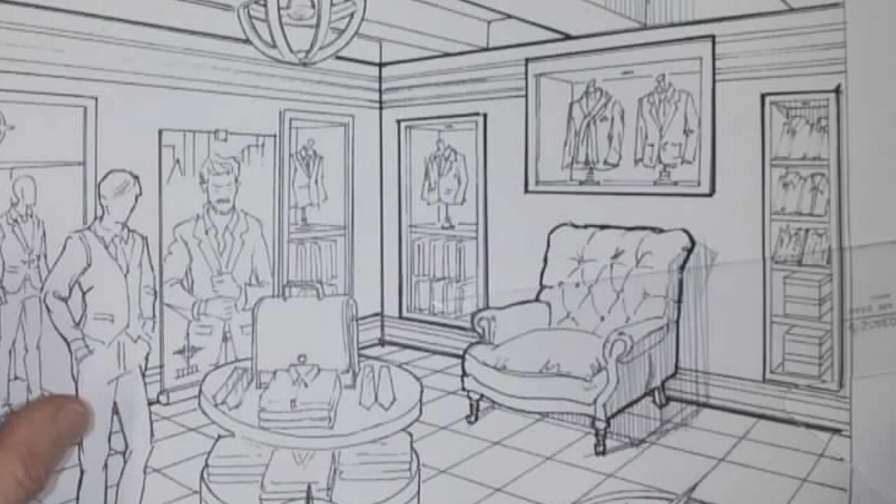And I would go in and detail this wall. And I would detail the outside of my light fixture, my banner, this, and my round table. In this case, I would go right around what's on top of my table, and then I would go around my table. I go all the way around, but I wouldn't go inside. I'd just go to the outside, and I'd be using my ruler for this. Yeah, please use your ruler for everything except soft things.

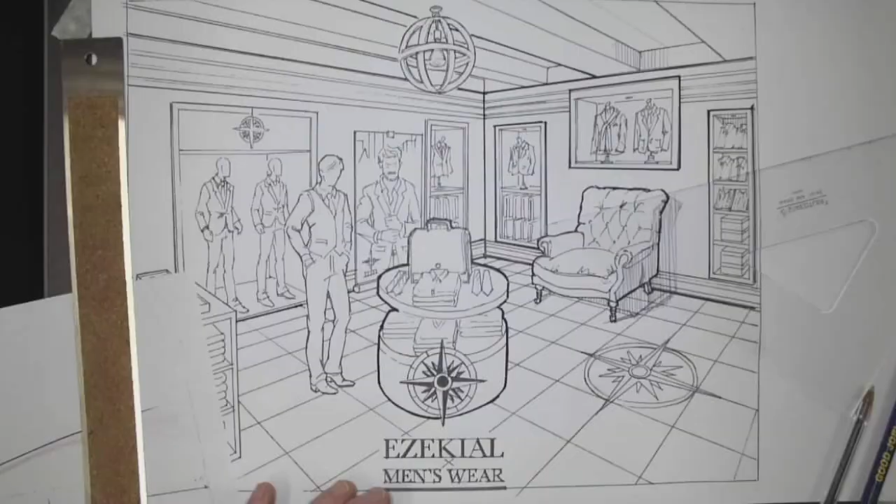So you see, that would read as a piece in front of that. That's very important too. Now this is my logo, and it should read with the lettering down below. Your logo has to be prominent. And as I was explaining, mine is a circle, so I had to be very careful where I put it. I had to balance it out with other circles. So if yours is round too, you'll have that challenge as well. You'll see it'll stick right out like a sore thumb; that's all you'll be able to see.

So just go around the outside of everything to create this silhouette. Now, do you always have to do this? No, later if you don't like it, but for this project you do. And you can cross your corners. That actually looks quite nice, and it gives you a more clean corner. So now, all of these things come from the discipline of architecture. They do all of this, and so it's become kind of a universally understood way to communicate certain ideas. But you can really see where I didn't use the ruler, and I should have done. But I did that on purpose, so you would see.

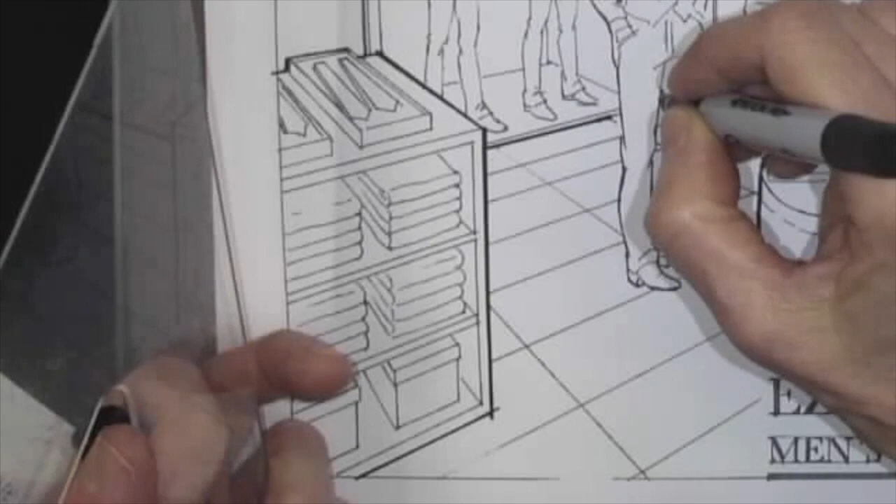And I would go in and outline my figure too, because he's part of the foreground. And I want him to read as what my customer base would essentially look like. Although I think women do a lot of this sort of shopping for guys, I'm not sure.

In choosing my name, it's the name I would give my hamster or my guinea pig when I get them. I really liked it. But it's also because it's a traditional name, as I explained. And I want it to be able to be a formal sort of place, but also it could be short form to Easy's. "I'm leaving, I'm going now." "Where are you going?" "Going to Easy's, pick up a sport coat for that thing. You know the thing?" "What thing?" "The thing, you know." So it could just short form it. That's what I was thinking as well.

So you don't go inside, you just stick to the outside. Oh, I'm almost done. Might as well finish. And then maybe the thing will turn off and I'll be finished. But so, and then everything reads suddenly as a silhouette. I wouldn't outline that. I didn't fill it in the way I did this because that's just part of the floor. And then with all our shadows hatched in, it will look very striking. And the shadows are very, very thin, hatched very, very thin.

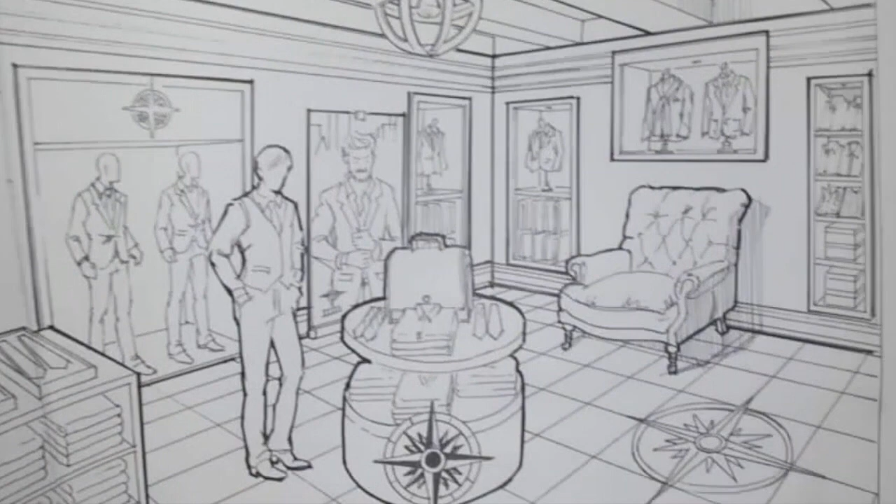Okay, so that would be, now it's all filled in, and it does take a long time. It takes a very long time. To get the drawing to this point takes a really long time, so you'll be prepared for that. To do it properly, keep everything in perspective, it does take a long time.

So we'll start in class today, and then you can finish it up at home. Hopefully if you have any questions, you can get them sorted now. So try all your pieces of furniture, all of your displays, give them a go so that if you have some questions, we can get them sorted. Okay, so I think that would be as far as I would go with the black pen.